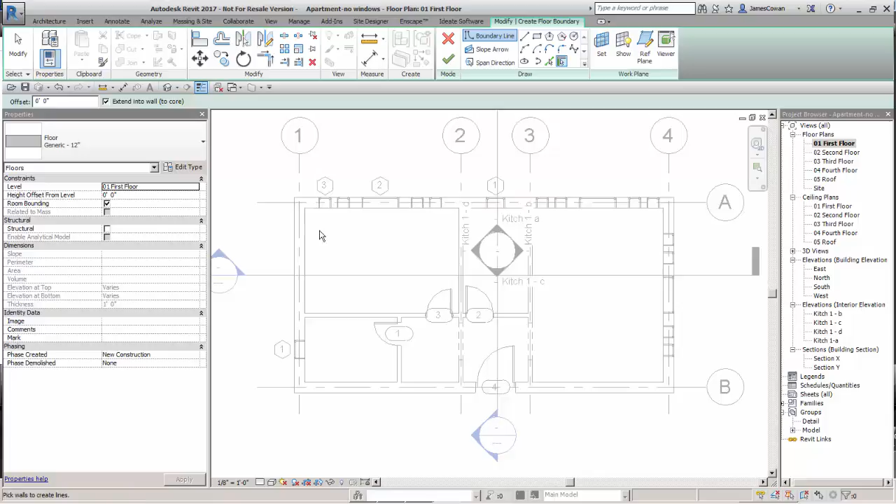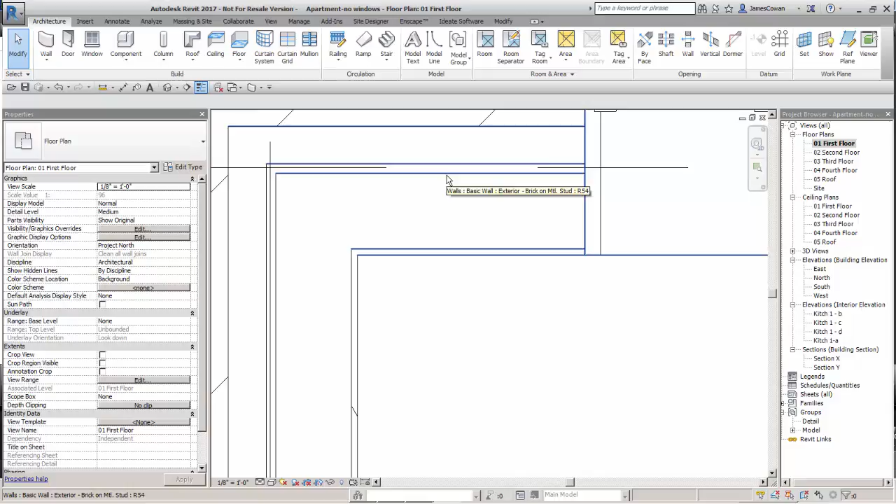Let me just zoom in on this a little bit. I'm going to cancel out just so you can see what I'm referring to. If there are materials in this wall, you won't see them until you tell it to look at a medium level of detail. So now I can see the gypsum board, and inside here I've got brick on metal stud. So I've got brick on the outside, then a gap, and then metal stud.

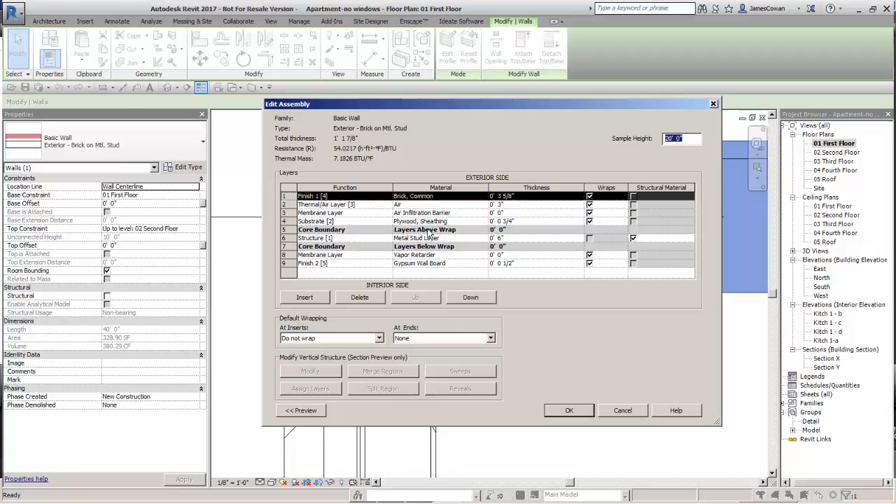Let me just pick the style and look at the structure. So it says on the inside, gypsum wallboard, half-inch, vapor retarder, metal stud, plywood sheathing. It's got a concrete floor, so the concrete floor probably needs to go to the outside of the metal stud.

So in his exercise, because we're going to build the metal stud off the floor, it says create an architectural floor. You can pick a style, and the style he wants is floor lightweight concrete on a metal deck, which if you looked at the type properties and the structure, looks like this: a metal deck with lightweight concrete.

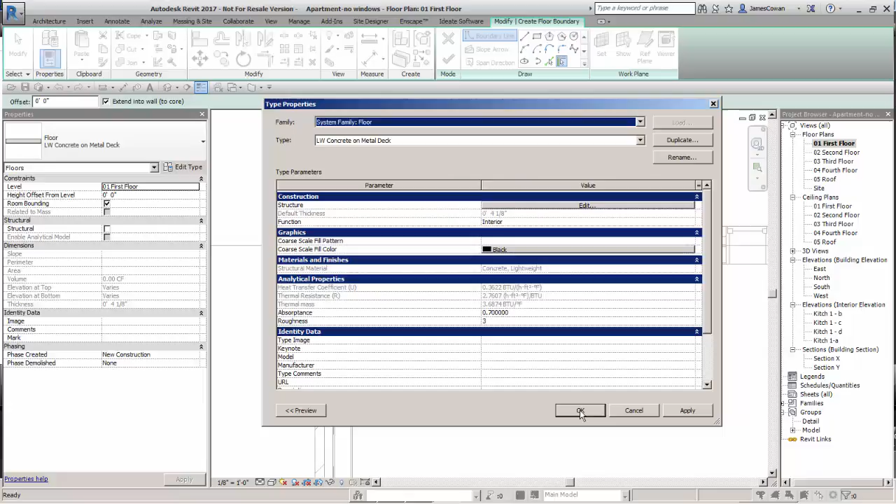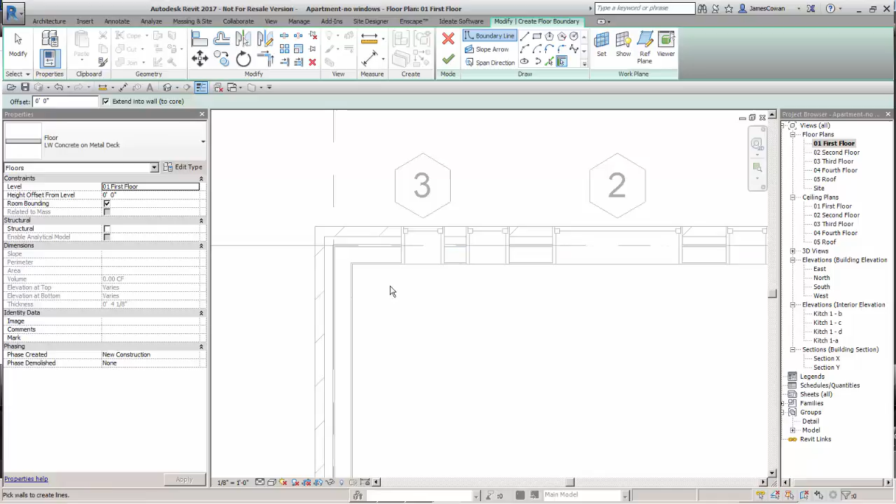Depending on the actual situation, let's do it the way he's got it here. In his book, I'm going to say at the top, pick walls. Extend into wall (to core) means, depending on where you pick: if you pick the inside of the wall, it's going to go to the face of the metal stud; if you pick the outside, it's going to go to the outside face of the metal stud.

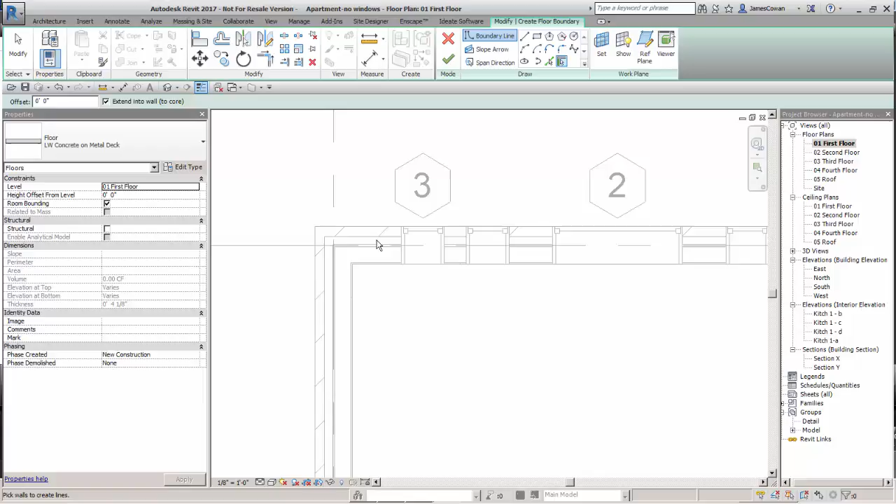Near the center of the north wall of the apartment, then press the tab key when the wall is selected. So what he's going to do is actually pick all of them. The tab key is selecting all the walls, and his cursor is closer to the outside face of the structure, so it's drawing the line all the way around the outside face of the structure part.

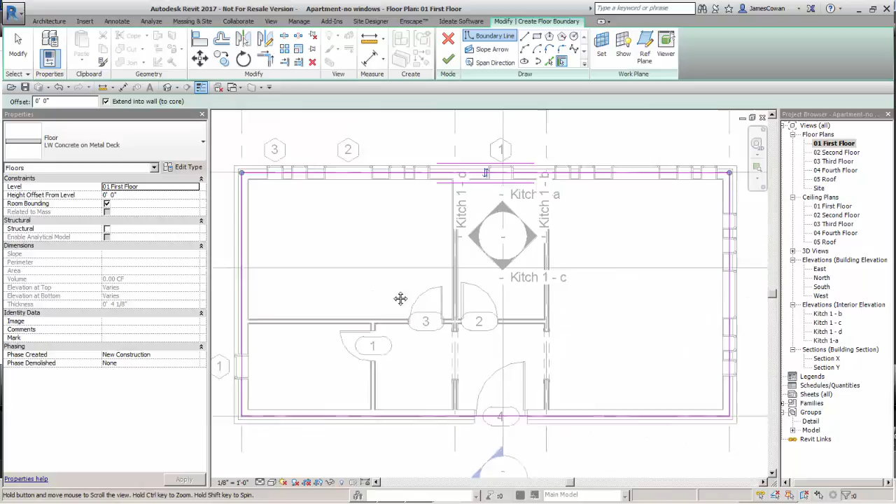You should see on that sketch a flip symbol right there, where if you want, you can flip to the inside or flip to the outside of the metal stud. He's got it on the outside. You then say you're finished, using the green checkmark up here, and that should create the floor.

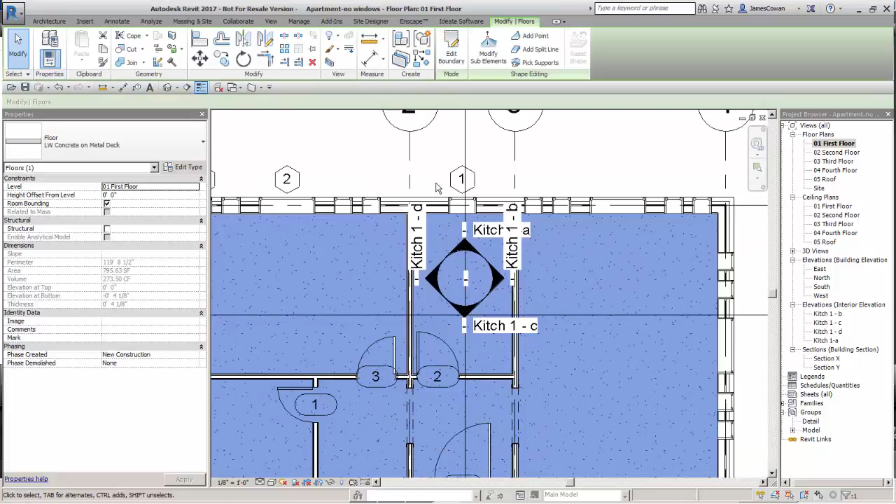And if I look at it, it's got this material on it. I need to elaborate on this, because another thing you'd want to do as interior architects is draw floors that are actually more of the finishes within the building - an area of carpet, an area of ceramic tile, whatever you can put on the floor. Right now we're talking about floors, but you can also put them on walls or other places - just a material that lets me, within a room, have an area that is Pergo flooring, an area that is carpet, an area that is tile.

None of that's in this exercise. Next part is the ceiling. So if you go to architecture and ceilings, there's some new options in there.

If you remember earlier in the exercise when I picked on a wall, I could show the wall as being room bounding. Well, it also works for ceilings. So when I either pick automatic and move in here, it's going to create a ceiling at 8 feet height.

We want the gypsum board on metal stud, so we can change the type and pick gypsum board metal, and come in and do them one at a time. If you're working in a floor plan, you're always going to get that message, because remember the floor plan is at 4 feet looking down, so the warning is saying none of these are visible in the floor plan.

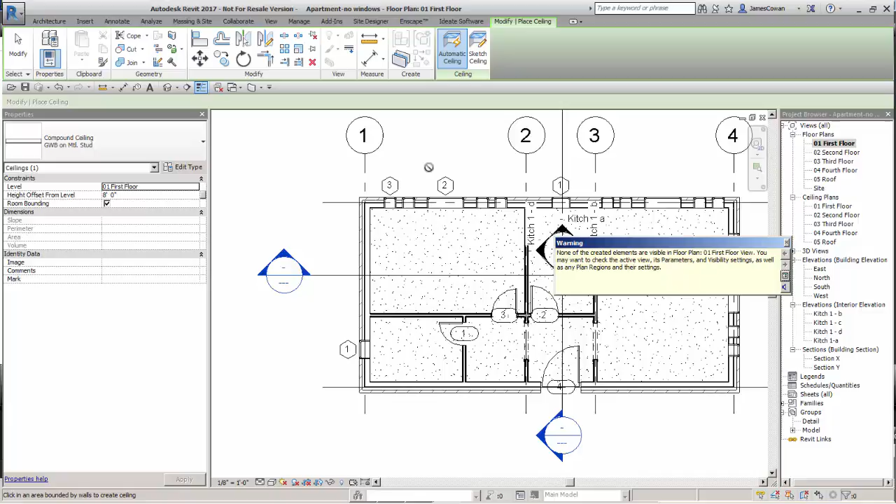Ironically, he's picked a style that isn't visible - if you go into the ceiling plan for the first floor, you can't see it either. You'll only see it in the section. You can't see it because there's no pattern on it. So if I go to the section, I can see it in that view.

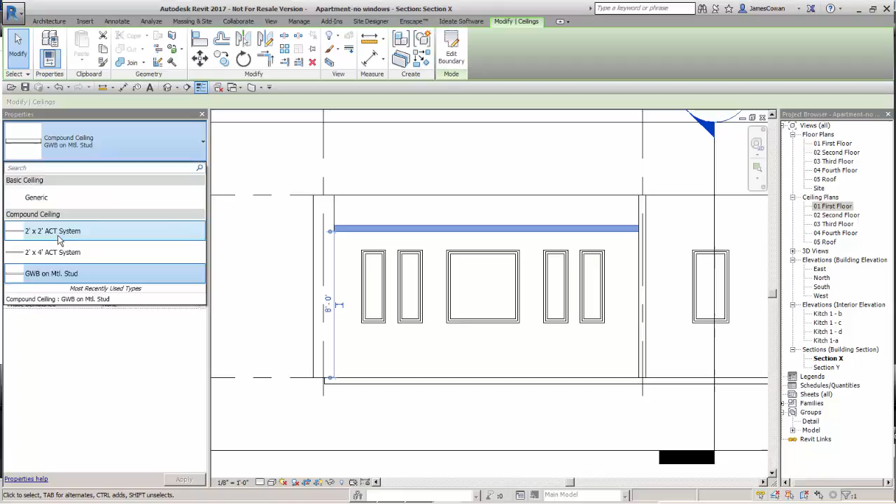If you change it, just for the short term, to a 2x2 acoustic tile, you would see that if you're on the floor plan, I can't see it because I'm looking down. But if you're on the ceiling plan, you can see the option that's there, the actual ceiling tile. You're at 7'6" and looking up, and the ceiling is at 8 foot height.

Now, you typically, when you're doing ceilings, want to work in a ceiling plan for the floor you're working on. So back to the build tab and ceilings - you can actually now do them all automatically. So if you just say automatic...

And then you pick. So I'm going to pick a style where I can see the pattern, 2x2, just so I get visual confirmation of what I'm doing.

And then if I do something like right click, select all instances in my project - so if I pick the ceiling, I'll do it in a section view, right click, select all instances in the entire project - that's all of the 2x2 ceilings.

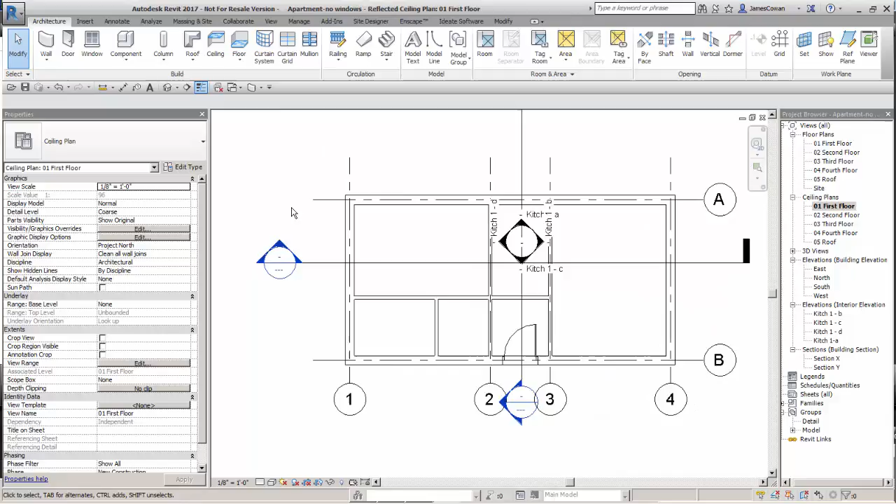And I'm going to change them to make them gypsum board on metal stud. So now the issue is you won't see anything on there because those ceilings don't have a pattern, but they're in the model, and you can see them when you do a 3D cutaway.